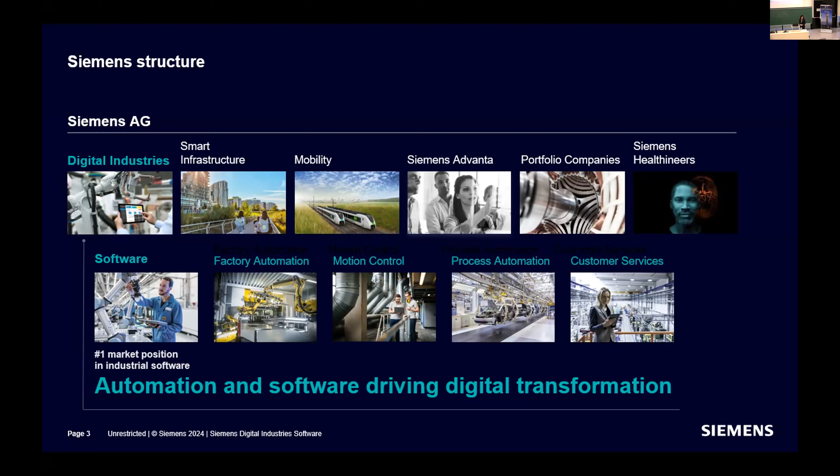Siemens, as you see, is composed of different business units. One of them, called Digital Industries, is the one I work for. In particular, the Digital Industries Software division is dedicated to selling software to build the digital twin.

This is the abstract. I will move forward to the other part of the presentation.

Everybody is living the digital transformation. It's impacting every single industry, every single person, and we are living in this digital transformation. The scope and benefits of this digital transformation are to improve efficiency, reduce cost, and of course drive our growth. How are you living this digital transformation? How are we living it?

It's a journey. Thinking at the beginning of my career, tentatively from the 80s until 2030, we can think that we are living this transformation, moving from paper to 2D, to 3D, to DMU, to simulation, and this was supported not only by software but by hardware as well. So we are living the evolution of technical support that provides us the possibility to continuously evolve and improve.

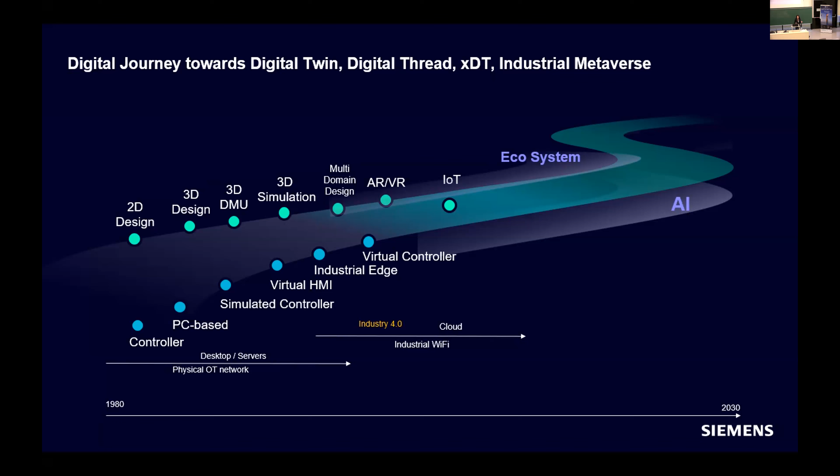But it's not enough, because we have to engineer the product, engineer the production, and engineer the simulation and performance into a multidisciplinary ecosystem. That, of course, is helped by artificial intelligence. And that's why we talk about digital twin.

Extending the digital twin to the executable digital twin, and moving with the cloud and 5G to the industrial metaverse. Now, a little bit of statistics.

How many of you have heard about digital twin? Everybody, of course. How many of you have heard about the executable digital twin? The industrial metaverse? Okay, I'm happy to see that not all of you are raising your hand, because I can share something you've never heard before, or have only heard partially.

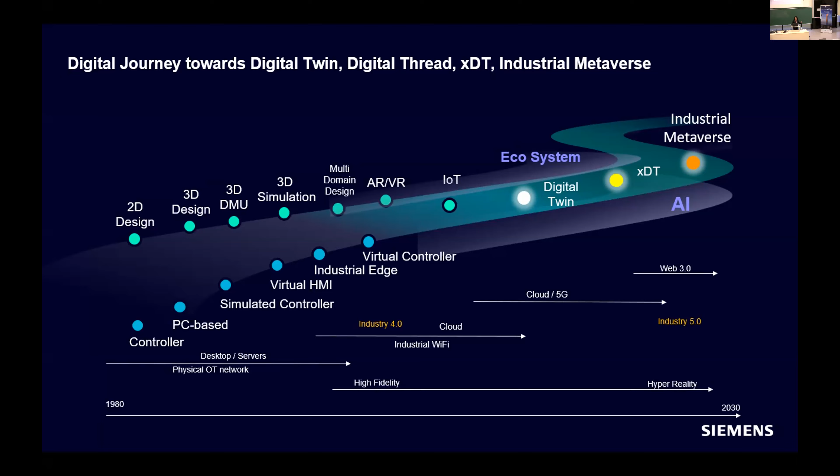Let's go investigate how we move from the high-fidelity digital twin to the hyper-reality digital twin, moving to the industrial metaverse, with this criteria.

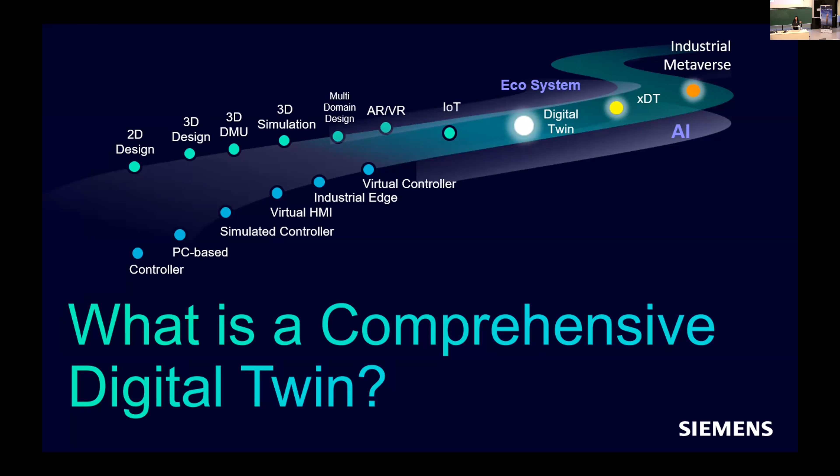What is the comprehensive digital twin? I'm not going to describe in words what the digital twin is, because you'd kill me - you know, I know what the digital twin is. I want to share with you what the digital twin is for Siemens. Not because we are inventing something different, but because we are providing solutions - we are providing the digital thread components to build the digital twin.

For Siemens, the digital twin is not only the twin of the product, because we also have to take care about how we produce that product - so we support the digital twin of the production, of the factories, for example. But this is not enough, because we also have to take care about the digital twin of the performance. The life cycle of the product starts from when it was first thought, to when it's destroyed, scrapped, or used - and that's why we take care about the performance as well.

So when we speak about a digital twin, we compare the digital and the real product, the digital and real production, the digital and real performance, and we mix them together to try to create a closed loop, taking the data of the performance that is used to improve the new product and also for maintenance purposes.

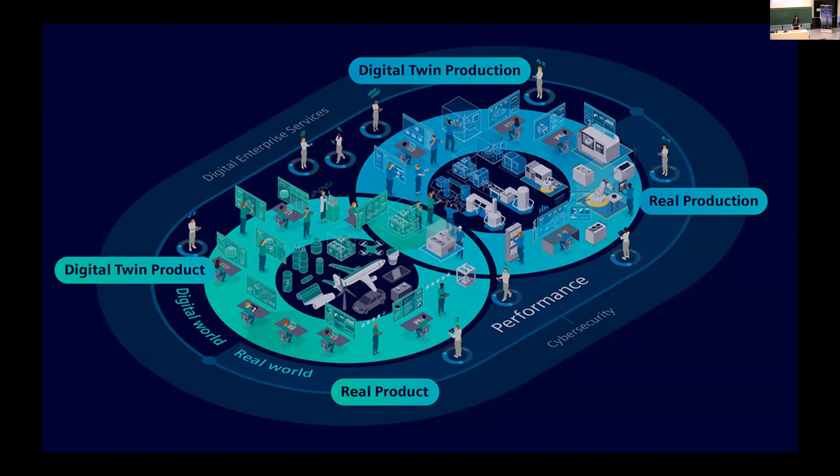Let me show you a video which summarizes very shortly the different scope of the digital twin solution supported by Siemens. It's not all-inclusive, it's just a flash.

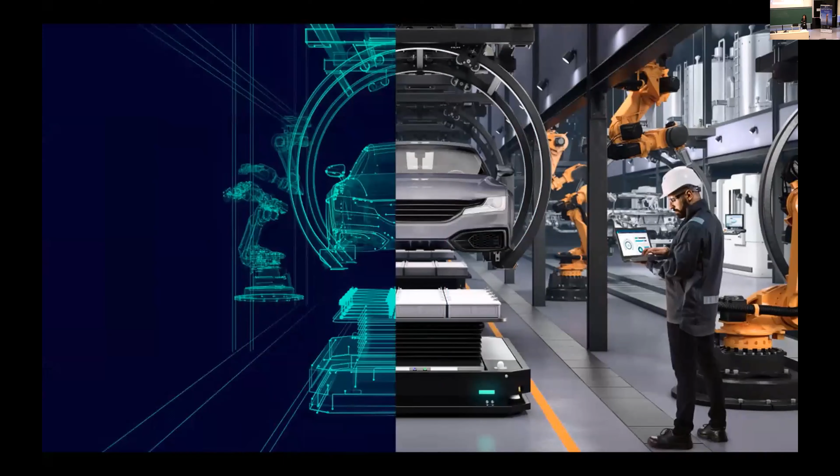There are two sentence words that I really like from this video. One is the holistic approach, because it's true that during this evolution we have to work in a holistic way, thinking completely in a wide dimension. And another word that is very important for everybody is sustainable industry.

One of the most frequent requests we receive from our prospects and customers is this: I need a solution because I want to become sustainable. They say, I must become sustainable, because sustainability today, it's not a wish, it's a must. And that's why the digital twin is helping more and more to become sustainable.

Because, of course, we can produce these products and production virtually, saving money, reducing errors, reducing the physical prototypes, and improving the time that we have to dedicate to ramp up to the production phase. So that's why it's important, but let's see some testimonials.

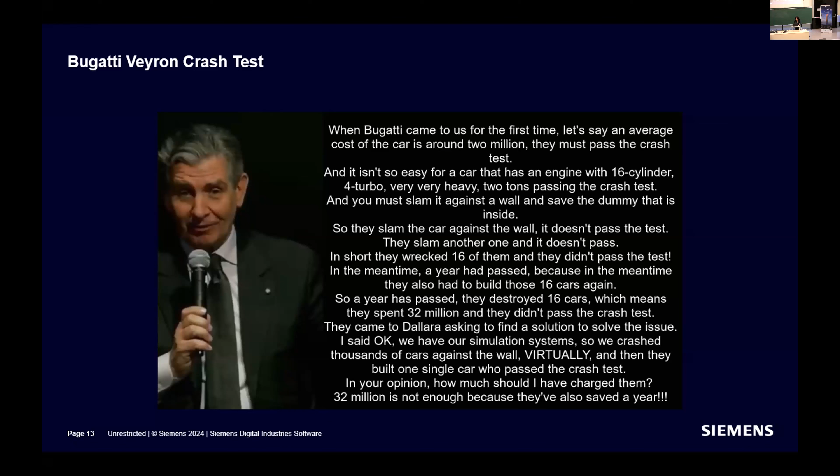It's funny, but it's true. Can you imagine the panic from Bugatti's people when they couldn't pass the crash test? They couldn't produce the car without this type of certification. And so this is a real example where they save money, they save time, and of course they reduce physical prototypes, which is a waste of material, a waste of energy. In this way, they have been more sustainable.

But this is not the only example. There are some examples, you know, where it's not a matter of timing. It's a matter of doing it right the first time, because there's no possibility of error. You must do it right the first time.

I'm talking about the Curiosity rover, which was realized and landed on Mars in 2012. We are moving through the years. And of course, also this time, we provided NASA JPL a solution to build and simulate the Curiosity rover.

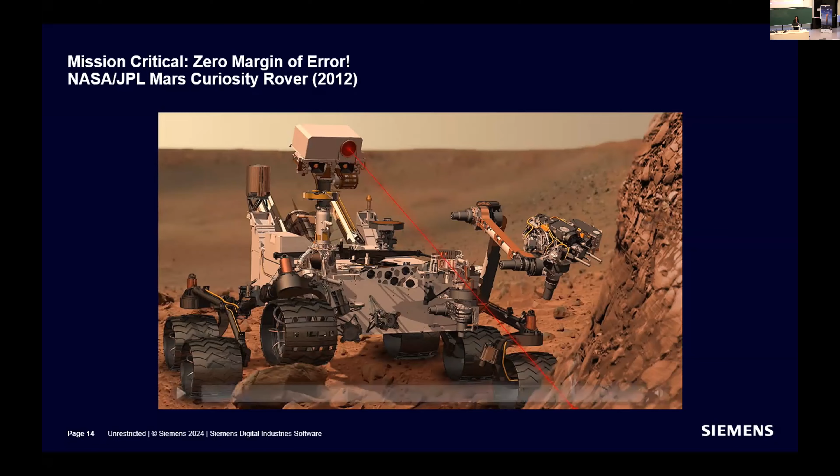Zero margin of error - this is the key word. But success of the JPL Curiosity rover Mars Science Laboratory required a level of complex engineering and planning beyond any other mission to date.

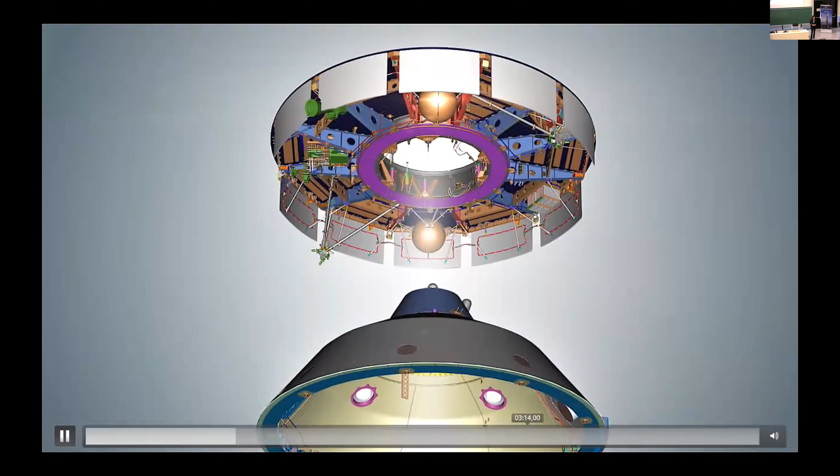The team had to design a vehicle to house the world's most advanced scientific laboratory in a space rover, plan how to safely transport a 1 metric ton payload, and plan how to safely land it on Mars, all in a virtual environment. And there was zero margin of error.

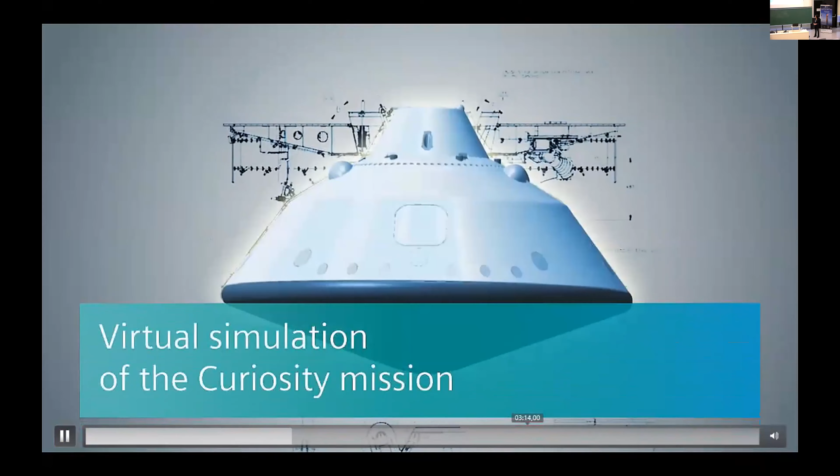Siemens PLM software gave the JPL engineering team confidence that their decisions through design, build, test, and validation would result in success.

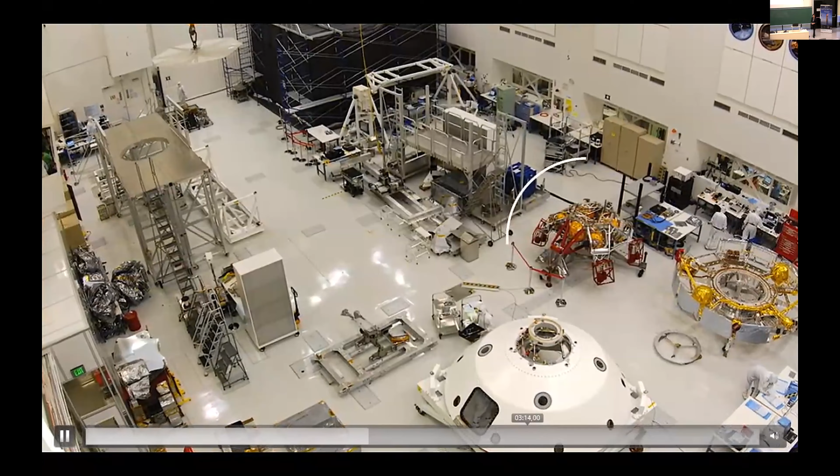The rover is made up of tens of thousands of parts that needed to work together to get through launch and beyond. The 2-year scientific mission required a redundancy of systems, which doubled the density of the systems on the rover. But the trick was that the size and volume of the payload could not increase. JPL engineers used Siemens PLM software to help design and test the parts before assembling the system.

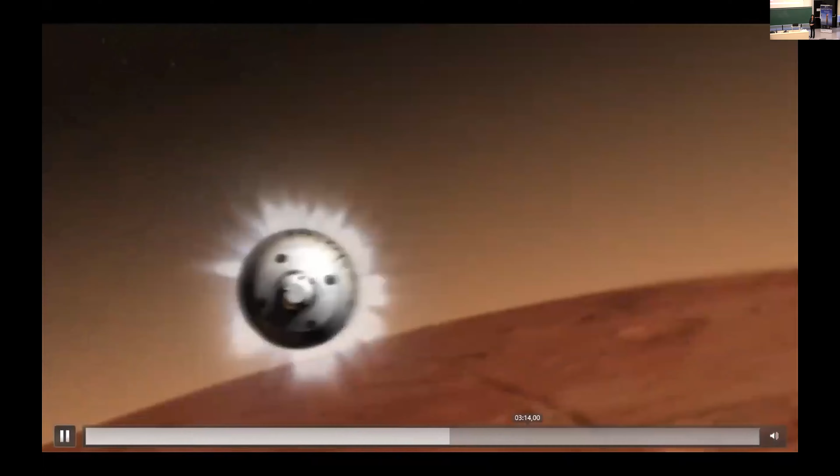Extreme temperatures posed another major mission-critical challenge. Thermal analysis ensured the team that the Curiosity rover, all of the sophisticated instruments, and the spacecraft that housed it all could endure the extreme temperatures.

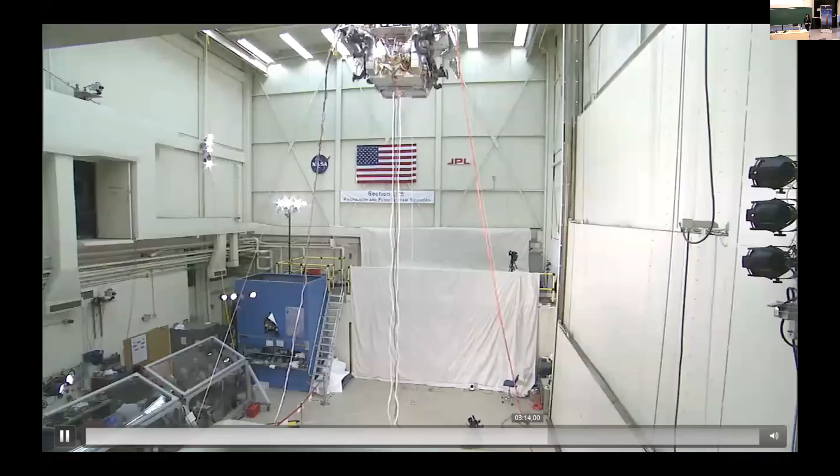Curiosity's total mass is 15 times larger than the science instrument payloads of 2 previous Mars rovers. Innovative maneuvers and technology to land a heavier spacecraft with greater precision were also developed and proven using Siemens software. And Curiosity made a perfect landing in August of 2012.

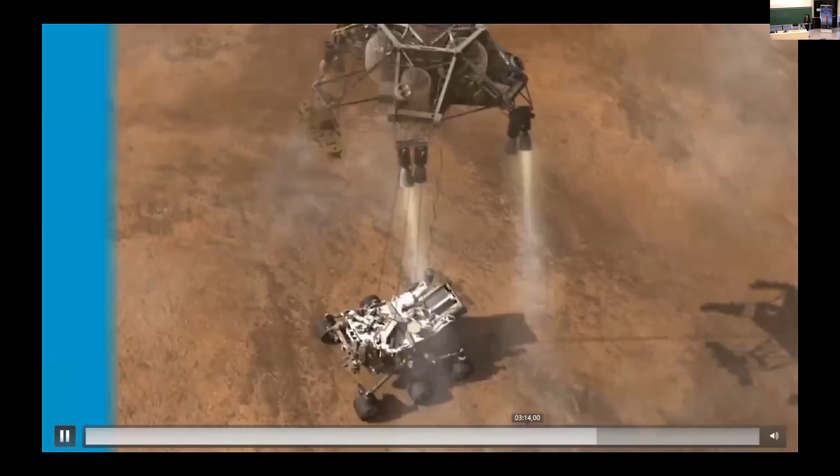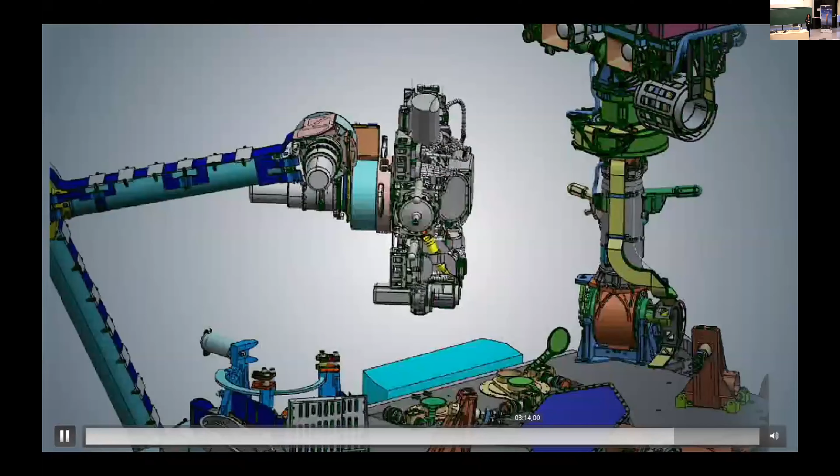PLM software technology from Siemens was also used by JPL engineers to design and simulate the 10 highly sophisticated science instruments aboard Curiosity. These are now successfully being used to send lab results of rock samples back to Earth to analyze and determine whether conditions were ever favorable for microbial life on Mars. During the rover's 2-year mission, experiments like these will help us learn more than ever before about the red planet.

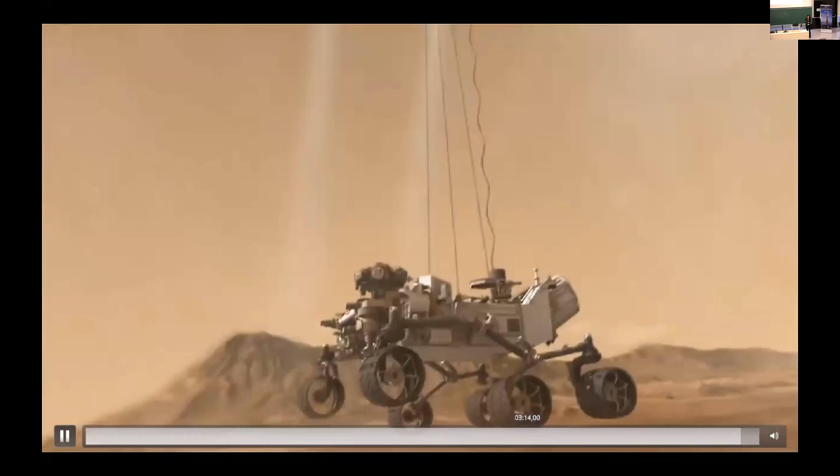From the smallest mission detail to the most complex engineering feat, Curiosity proves that Siemens PLM software is mission critical for a trip to Mars.

So this time, we cannot say we reduce, we eliminate error. We have to eliminate completely the errors. And of course, realizing many virtual prototypes and simulating them with this multidisciplinary simulation.

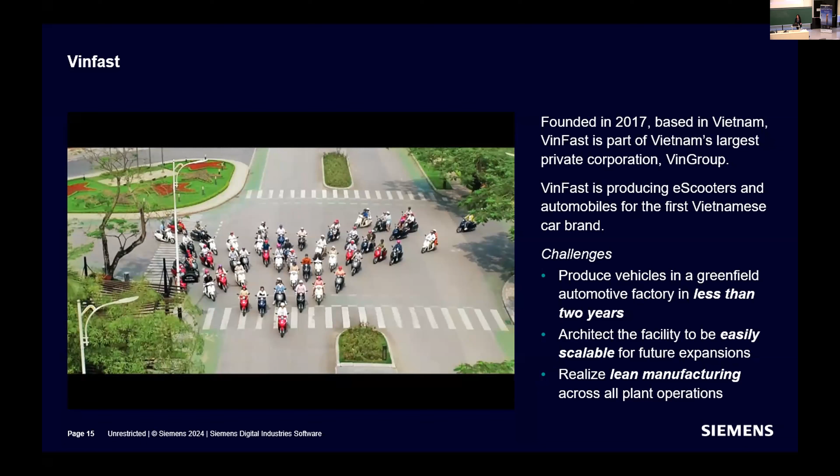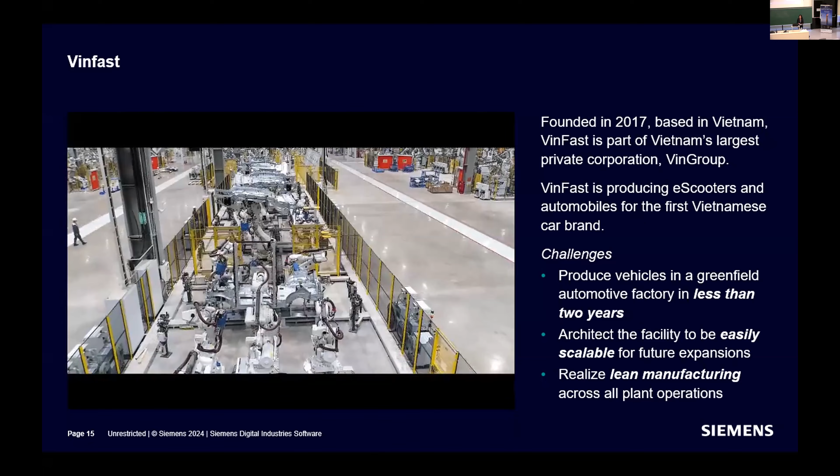The last example, not because we have only 3, but in the interest of time, is this one, which is related to VinFast. VinFast is based in Vietnam, an automotive company which is producing electric scooters and cars. And their objective was to create a production plant from scratch in less than 2 years. From scratch, a production plant.

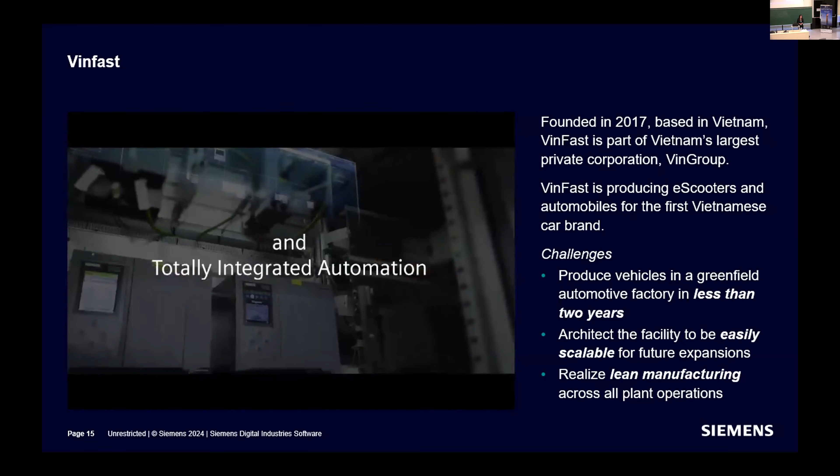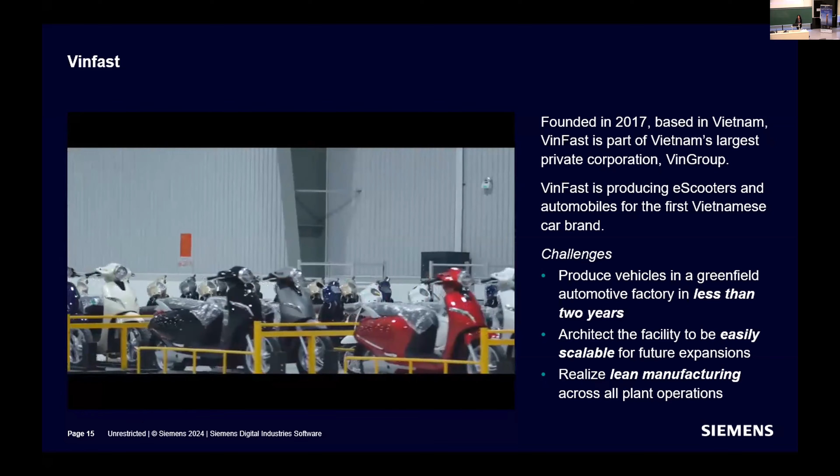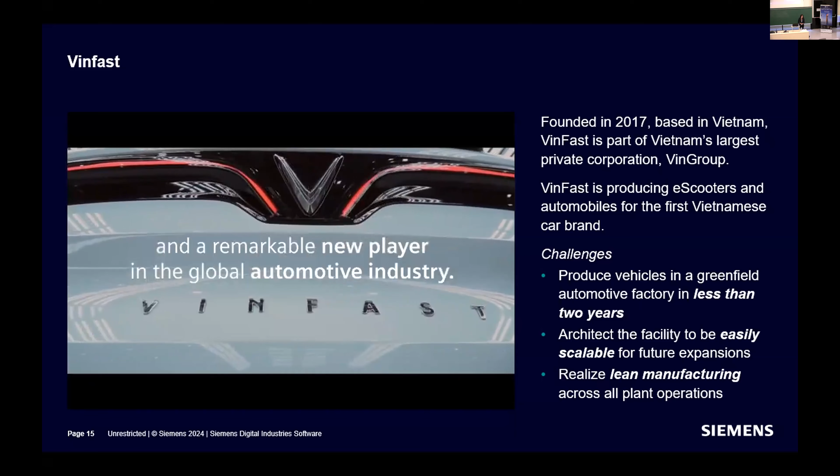So the intent of this plant is also to be scalable, because they want to be ready to improve the production quantity and line of product, and at the same time they want to implement the lean manufacturing plant operation. And we supported this company with our product, with our software, in order for them to create the digital twin of the factory and simulate it before producing physically.

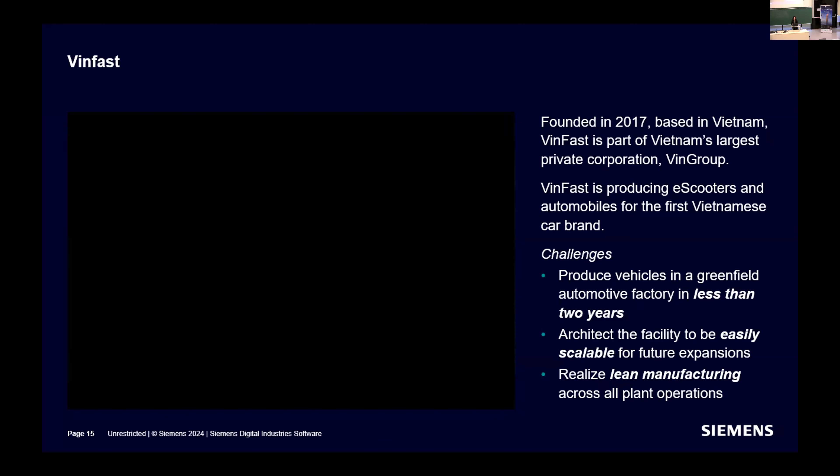But this is not enough. We have been talking about the digital twin so far, and this is also well known. Maybe you didn't have the perception of the huge amount of applications that are available.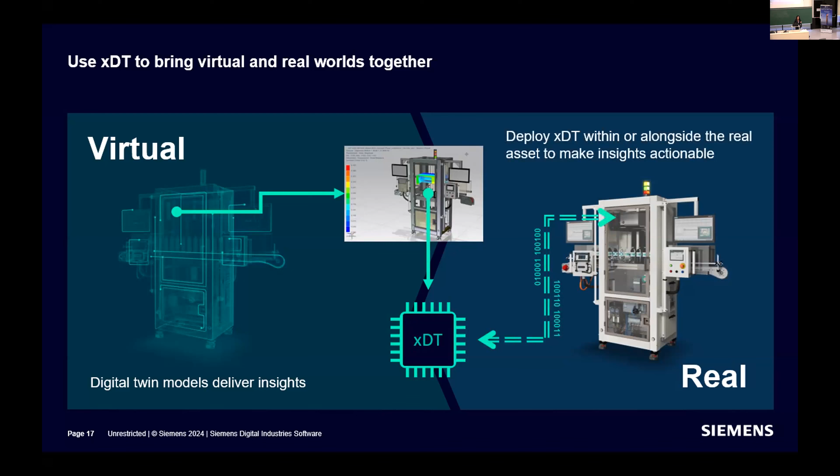So being inside the physical asset, this extended, or executable digital twin, is able to transform the IoT data through the simulation, providing some type of information to the engineering. So it's providing information related to the behavior of the product, and in this way we use it to control and to optimize, but it's also used for the maintenance.

In order to predict the maintenance instead of realizing scheduled maintenance. This possibility to predict the maintenance is absolutely important, because it's saving time, and is also able to improve the usage time of the product itself.

One typical example that I provide to explain a possible use case, when the executable digital twin is important, is where we cannot set up the physical testing sensors, because maybe the temperature is too high, and so we have to take some other different data, putting it together with this packaged simulation object, and by analyzing the data, we are able to extract some other behavior that was impossible to measure.

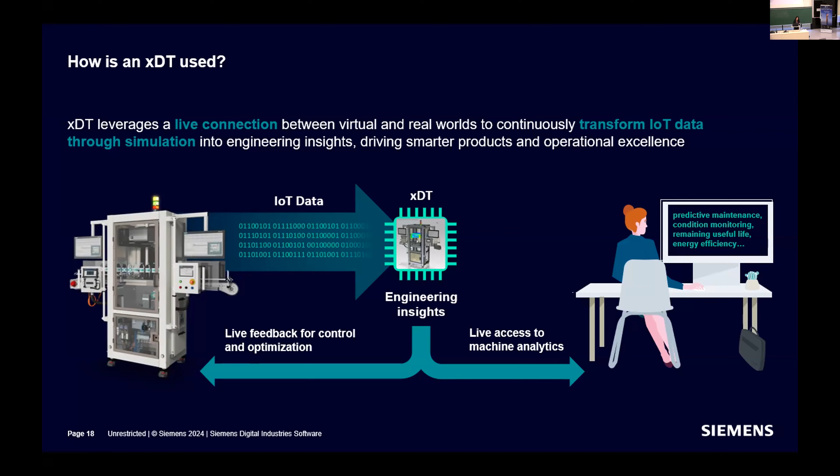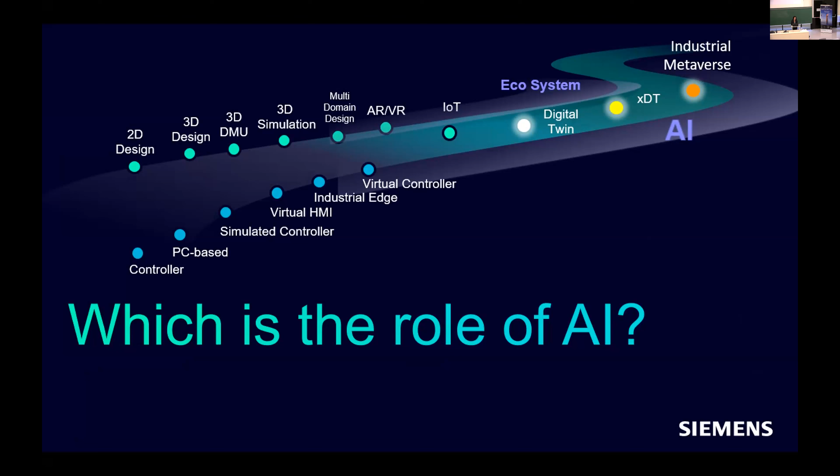This is only one of the examples. But this is not enough, because, of course, as everybody, we have to leverage on artificial intelligence, used together to help ourselves, to help our life, which is the role of artificial intelligence. Artificial intelligence is a key component in every single piece of our software. There is not one piece where it's not available and not useful.

And when I talk about artificial intelligence, I used to say, of course, that we are only at the beginning. The best is yet to come. We are continuously working and improving, extending the AI with the help of the AI, which seems to expand a lot our possibilities and capabilities.

With a different scope, for example, we use the AI to analyze, setting a solution that is able to predict and guide the user in their daily job, to navigate the huge amount of data. Yesterday, we heard about the challenge of having a lot of data to be stored, but it's not enough - it's also a challenge that this data has to be analyzed. With AI, we can leverage some possibility to filter this huge amount of data and go directly to the data which really matters.

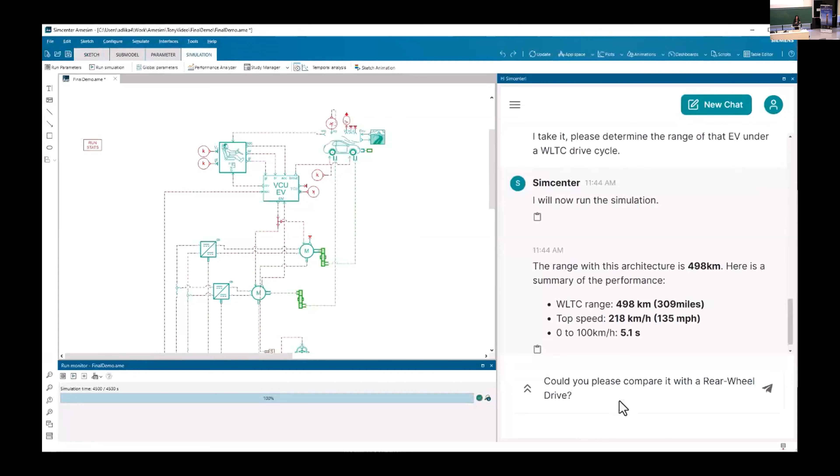I have decided to share only one example in the interest of time. We have many, but this one was the most important for me. Using our simulation software, we asked to design an architectural model for a car, and this car has been designed, and I can interact with the software, deciding if I have to choose the four-wheel drive or the two front, rear driving system.

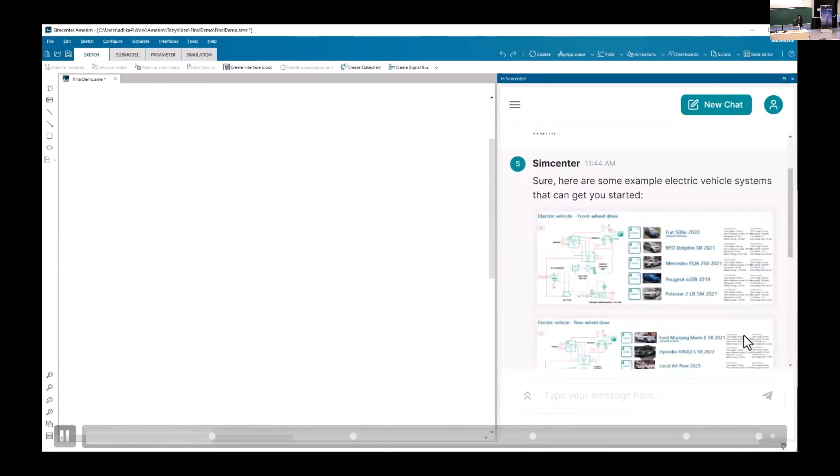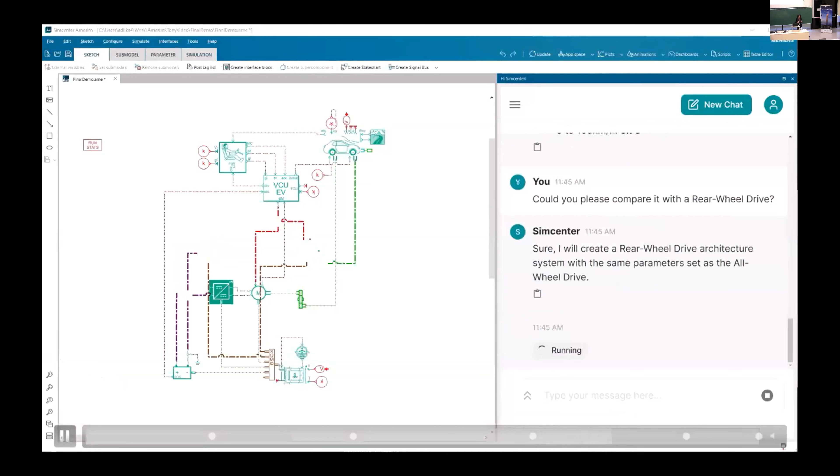And interacting with the software, I can also ask to simulate the performance and compare the four-wheel drive with the two. I'm running it again because it's quite fast, but I want to underline that the software with high capabilities is connected to the user, to the end user, asking questions and providing the possibility to choose from different options. Taking the source of data that is the master, the starting point, it's able to design a new architectural model and to predict and optimize, comparing with the different solutions that we can deploy.

Why is it important? Because it's saving a lot of time. Of course, these are all things that can be realized by people - that's where they come from - but leveraging on artificial intelligence, we have more possibility and can dedicate our time to investigate and to be inspired by new solutions.

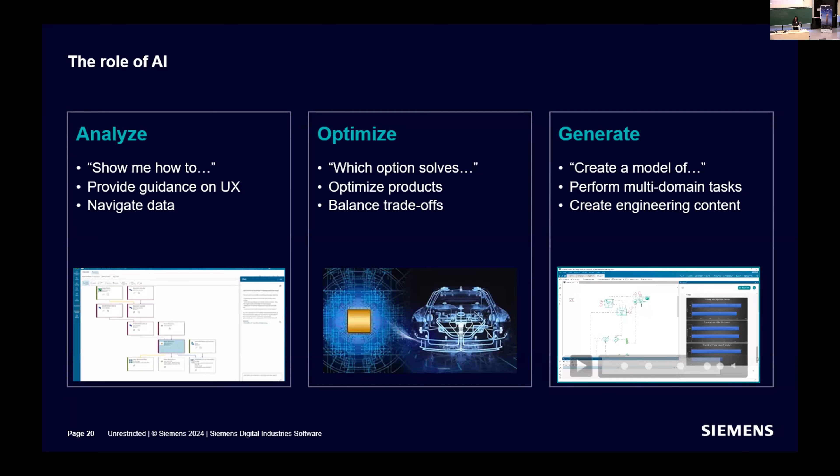And let's go with our journey. We are moving to the industrial metaverse. As with artificial intelligence, we are only at the beginning. But with the industrial metaverse, what we can take advantage of is mixing together the digital twin capabilities and the simulation.

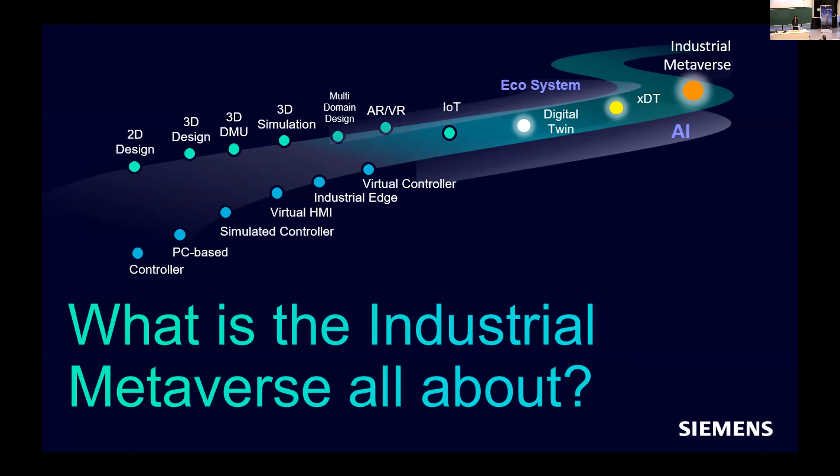Rendering the simulation result, multidisciplinary simulation, of course. So the metaverse is supporting the industrial market to see, to try, to ask. What do I mean by 'to see'?

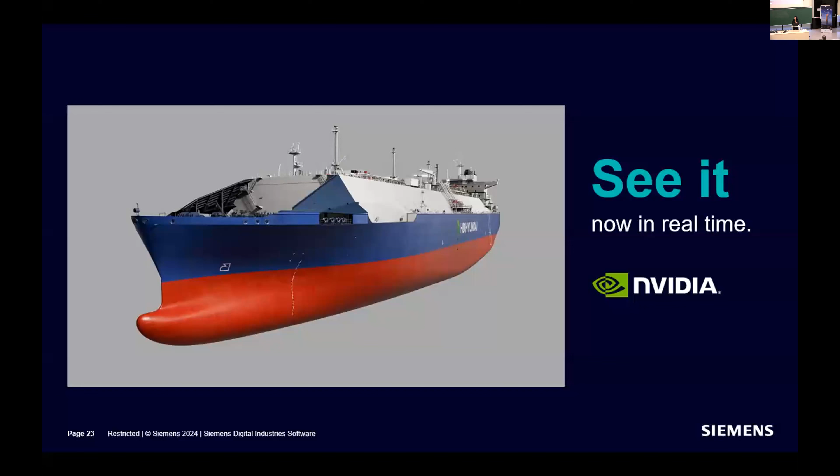Leveraging on the combination of two capabilities: the capability which is able to manage a huge amount of data as a bill of material into the product lifecycle solution, with the visualization RTX that is provided by NVIDIA, for example - through this collaboration we are able to render real-time some photorealistic visualization. Let me show you an example.

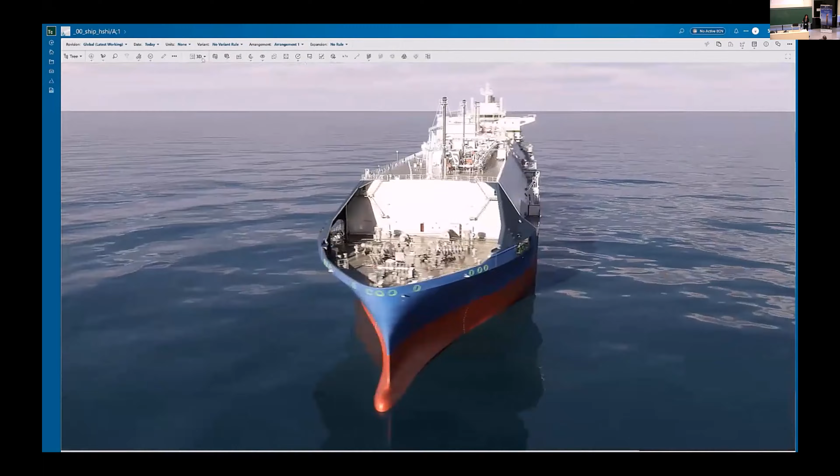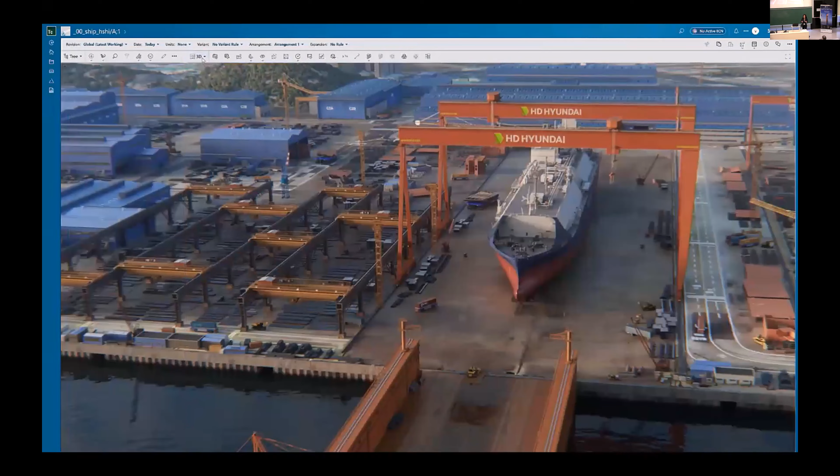It doesn't need to be underlined that there are a lot of data to be managed. And this is not, of course, a picture, this is not a video. This is a photorealistic render that is provided with the collaboration of NVIDIA. We are now talking about the visualization of the real rendering. As you see, we are mixing together the capabilities to visualize the object, the data, the product, and to simulate it as well.

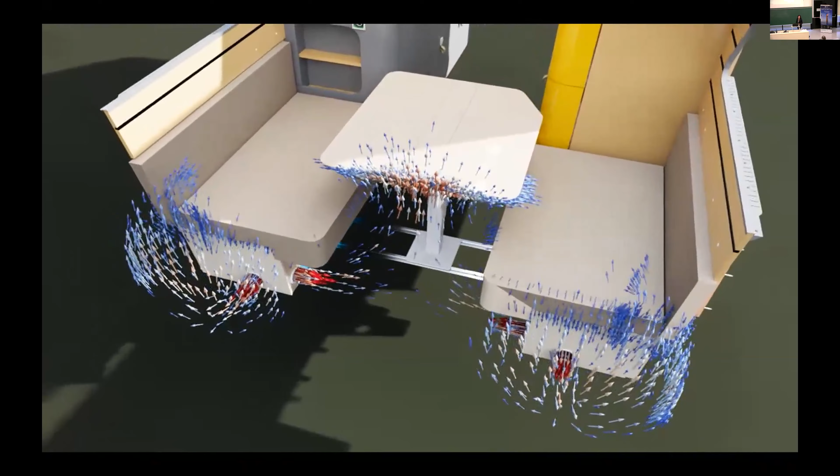Then we can leverage on the metaverse to try. And having another example, let's assume that we want to visualize this camper. It's quite common, and it's important to be able to analyze the refrigerator system or the heating system, the flow of the air, in order to provide a comfortable environment in any type of condition or weather condition.

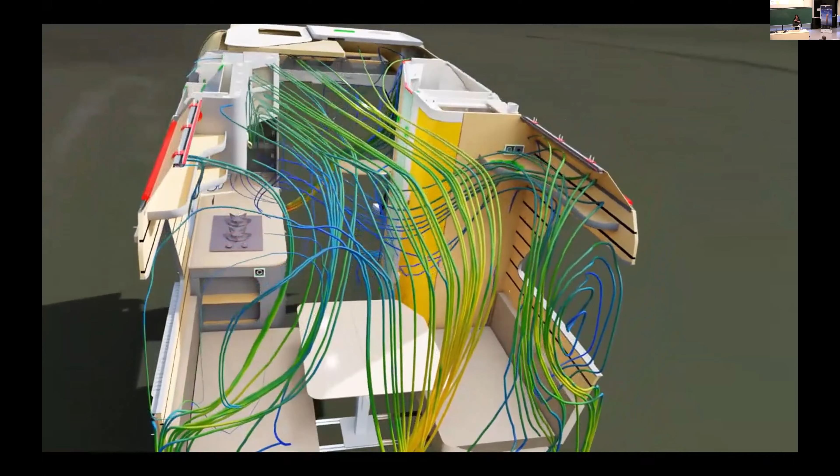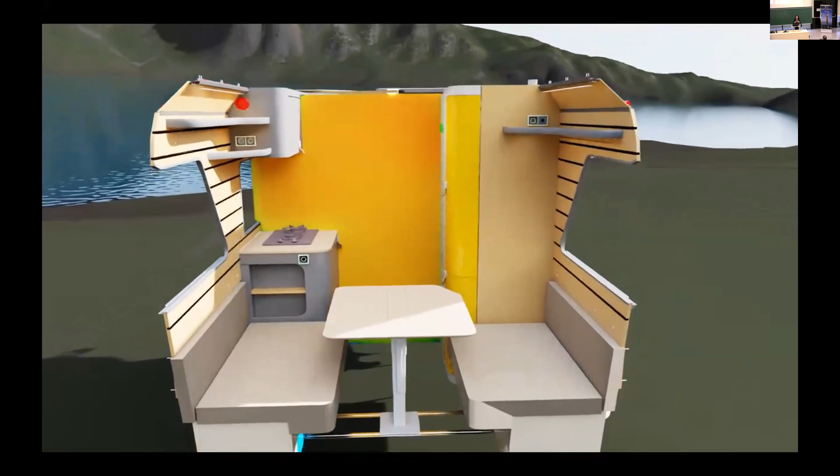We can simulate, as you see, in a different way, and we have all the capabilities and possibility to have a look also at the different parts of the environment, at different sides of the environment, analyzing the heat of the temperature in the different places, or the electromagnetic behavior that is the consequence of having the electrical cable moving around, available into this environment.

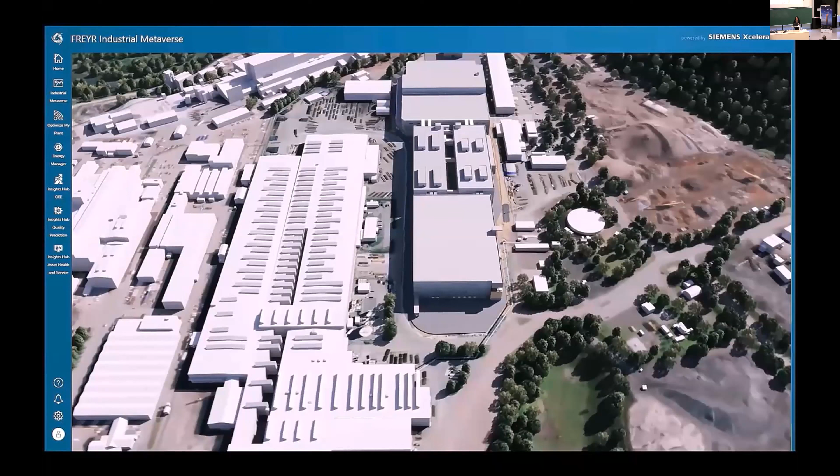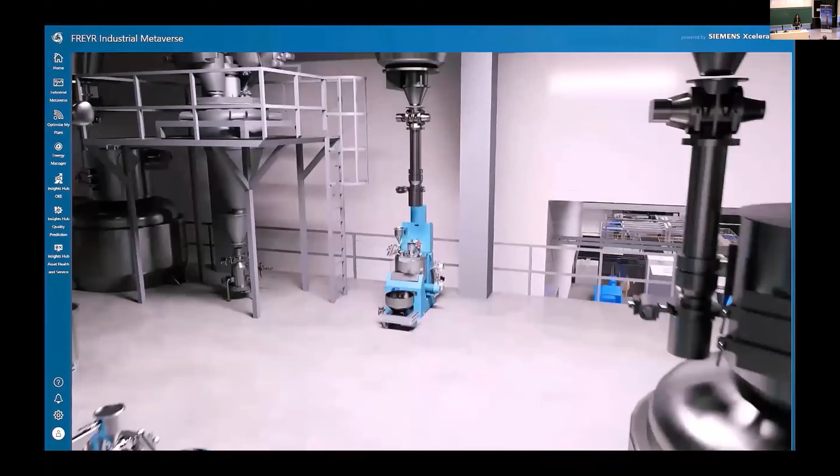And the last example, we call it Ask It, because we can leverage on the metaverse to mix the behavior of what we have realized and what we have created in a digital way, in a digital format, with the behavior, the real performance. So we can, for example, visualize the behavior of this mixer.

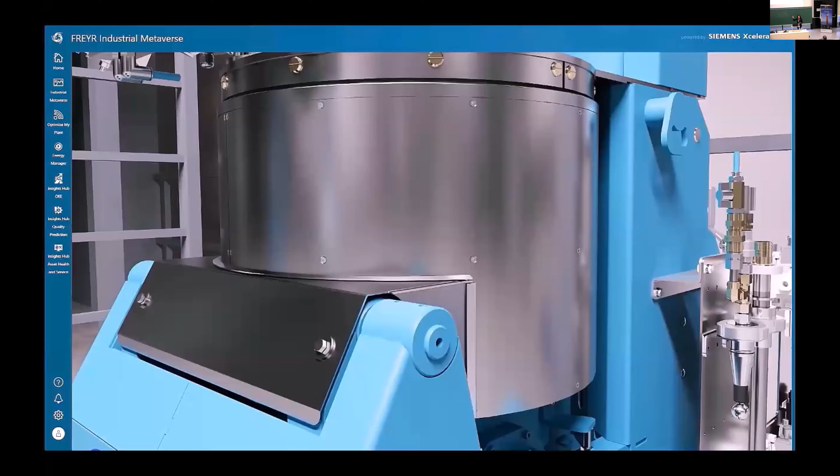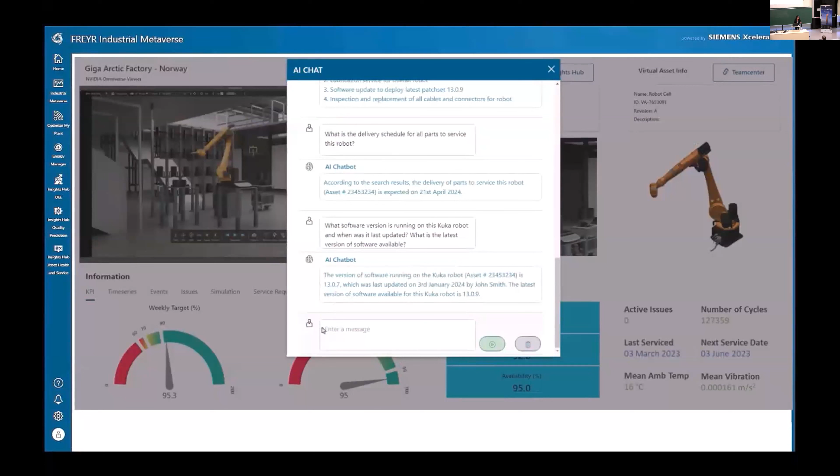This FREYR is producing batteries. And together with the visualization, we can take the data, we can analyze the performance, which is useful for the maintenance, but is also useful to analyze the behavior real time. And if in any case we face an error, together with the AI chat, we can ask a suggestion how to solve the issue that we have found at that time, real time, in the behavior of the product, of the component that we are analyzing.

I want to conclude this quick overview with another example, which is the industrial metaverse at Siemens Electronics factory in Erlangen.

I smile because I used to say something that I want to share with you. The question I used to raise is this: do you know which is the best example of a promising software, or if you really trust a software, which is the best example? And my answer is the best example is when we use the software.

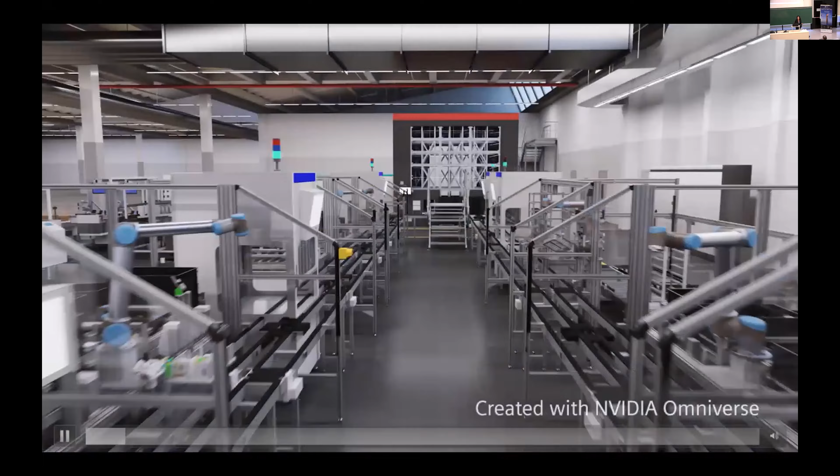So if we, Siemens, sell some software to realize the digital twin, we don't want only to sell to somebody else, we use it internally. It is the best demonstration that we really trust it, because also by using it, we want to continuously improve, we want the best for our software. And so this is the demonstration, the first, the customer zero, let me call it this way, of the metaverse, is exactly Siemens. So the industrial metaverse was for the first time implemented in our own factory in Erlangen.

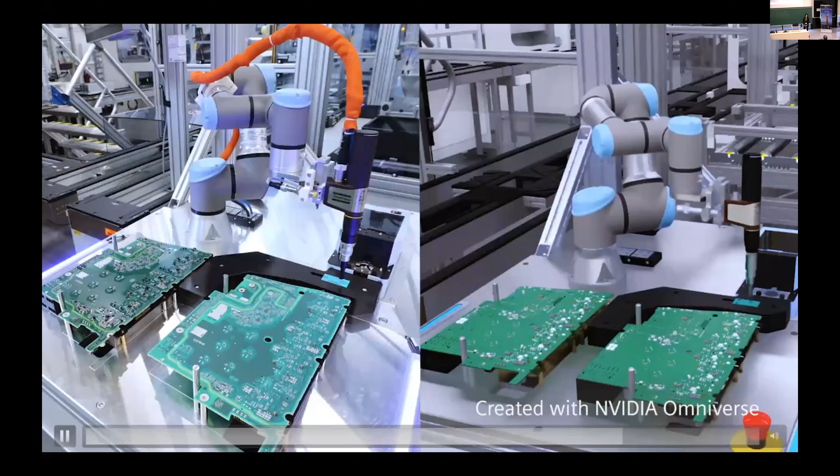I'm moving to the end of this journey with a comment. We strongly believe that this journey is not at the end, is not the beginning, of course, maybe it's in the middle, but what's important is that this is not a revolution. This is an evolution, a continuous evolution. It's not disrupting, as not to be implemented all at once, but I love to think that we are able to inspire the customers that we are supporting with our solution.

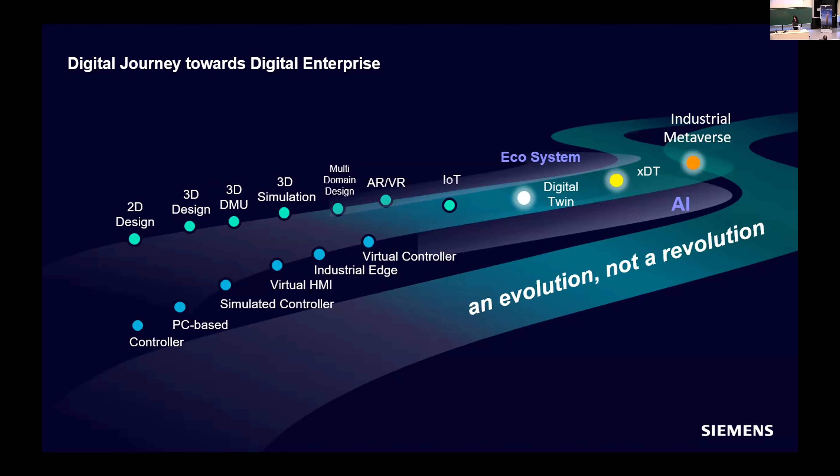And I hope that I've been able to inspire you, even if your type of job is different, but you are really the key people who are able to support this evolution, both our evolution as a software, but also the evolution of our customer. Being said that,